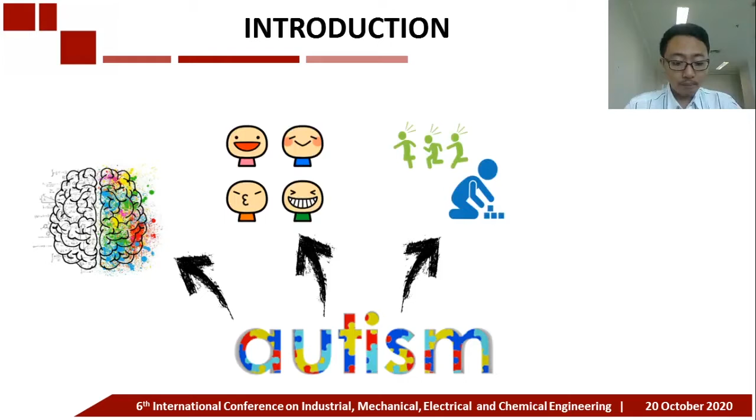Autism is a disorder that covers cognitive, emotional, behavioral, and social areas, including the inability to interact with people around him. Autism behavior is classified into two types, namely excessive behavior like headbanging, screaming, kicking, and others, and deficit behavior in the form of reduced eye contact, not responding, and being unable to socialize with others.

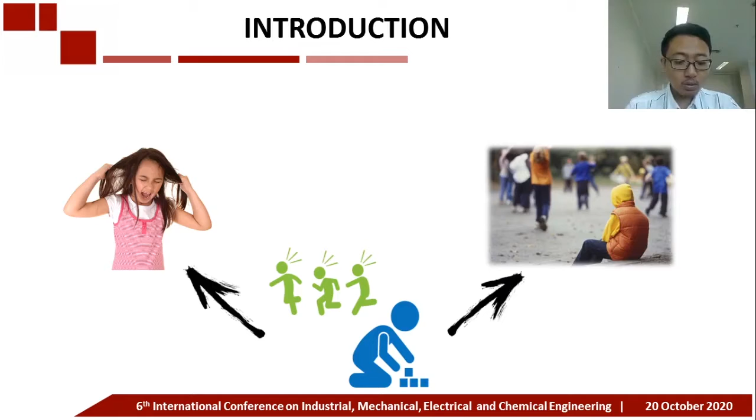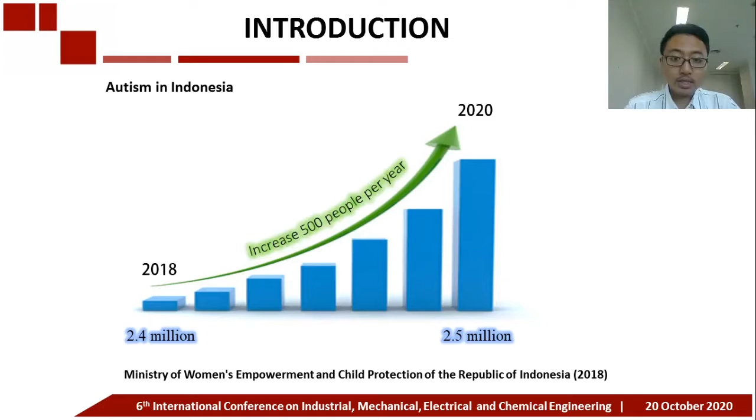Based on estimated data from the Ministry of Women's Empowerment and Child Protection of the Republic of Indonesia 2018, there were around 2.4 million people with autism in Indonesia, with an increase in new people reaching 500 people per year. So the estimated number of autistic children in Indonesia in 2020 is around 2.5 million people.

Autism therapy methods currently being developed include the deep pressure method. The deep pressure method is the application of certain pressure and in a certain time in depth on most of the outside of the body evenly. Deep pressure helps overcome the problem of oversensitivity to touch and can eliminate nervousness in children with autism.

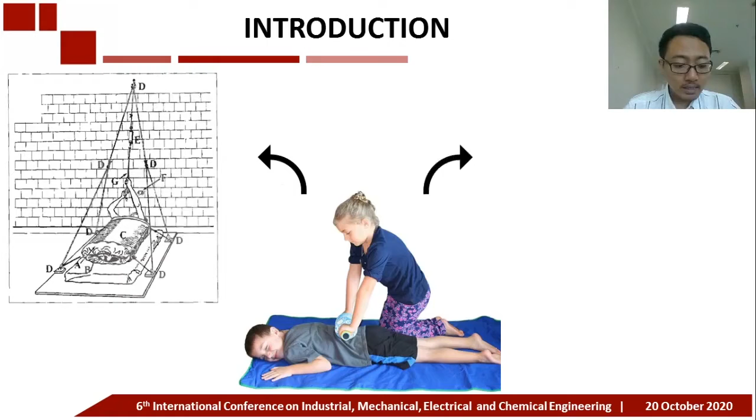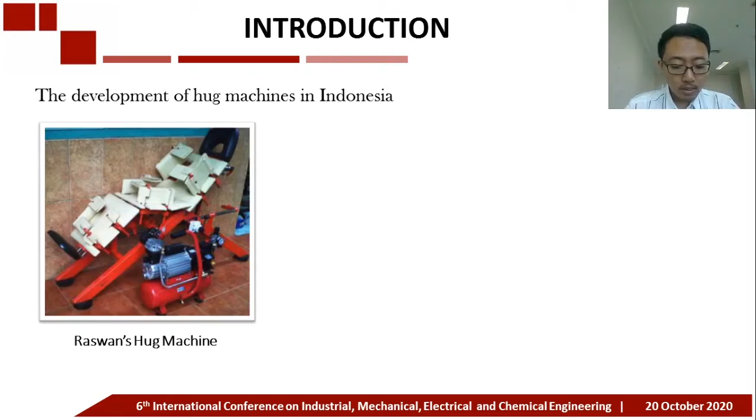The creation of deep pressure therapeutic aids in the form of a hug machine began long ago, like Krause's hug machine apparatus and Grandin's squeeze machine. The development of hug machines in Indonesia is still very limited. Raswan introduced a hug machine design based on the Grandin squeeze machine. The autistic child gets deep pressure from 3 pairs of pressure arms controlled by a pneumatic system. This hug machine has neither a portable nor a compact design.

Naufal designed an autism mobile seat. The pressure used an inflating wrap implanted inside the tool that can put pressure according to the user's wishes, using binding arms that can be wrapped around the body from the shoulder to the feet. This seat is designed to be used on transportation, but is not portable, so it cannot be applied to public transportation.

Suryo developed an inflating wrap type hug machine designed to produce deep pressure by inflating the balloon inside the hug machine, with a design pattern of fabric that can cover the shoulders up to the feet to give an even pressure. This hug machine is like a sleeping bag, so it cannot be used in public transportation.

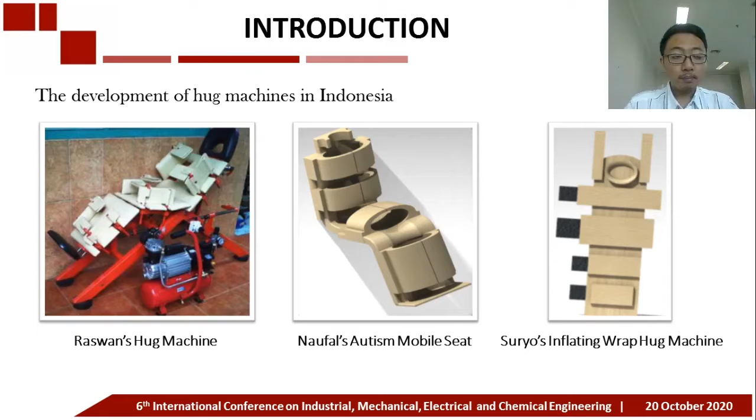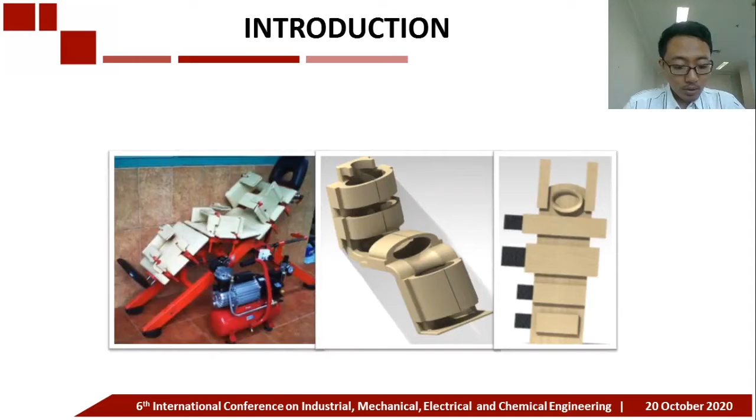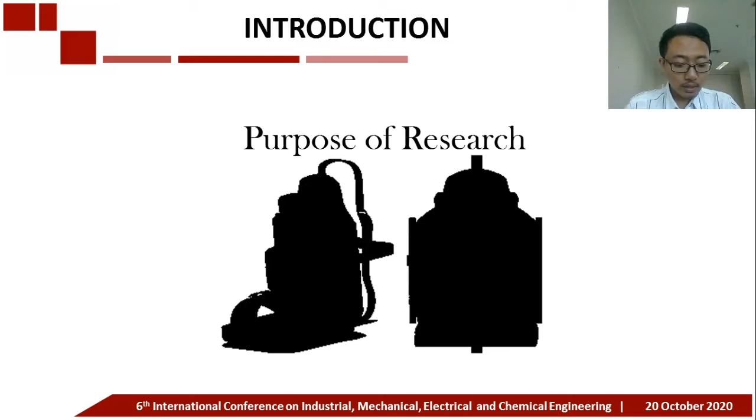Referring to the rapid growth rate of autistic children in Indonesia, the needs of children with autism for therapeutic treatment to prevent self-injury, and the few researches on tools for autistic children in Indonesia, especially hug machines, supporting facilities for children with autism and the development of more practical hug machines are needed. The purpose of this paper is to design aids for autistic children in the form of a portable seat, which can be applied to public transportation to provide a safe and comfortable facility to children with autism.

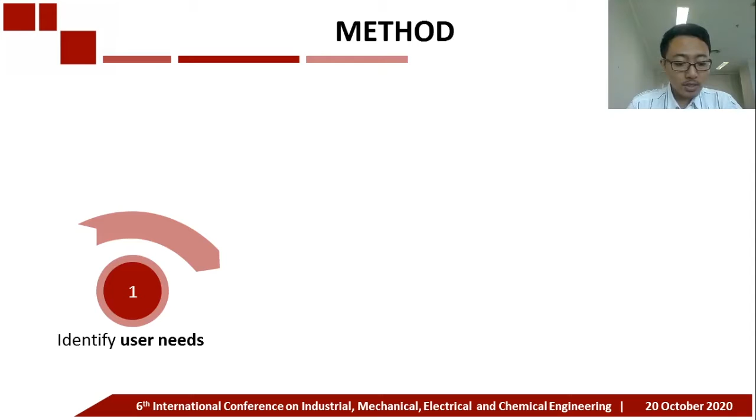In designing this product, several stages of the design process were carried out. The design process starts with identifying user needs by setting the problem constraints in the hug machine design process. Limitations of the problem include portable and lightweight, fit to the bus seat dimension, can serve 6 to 14 years old children, and have competitive prices.

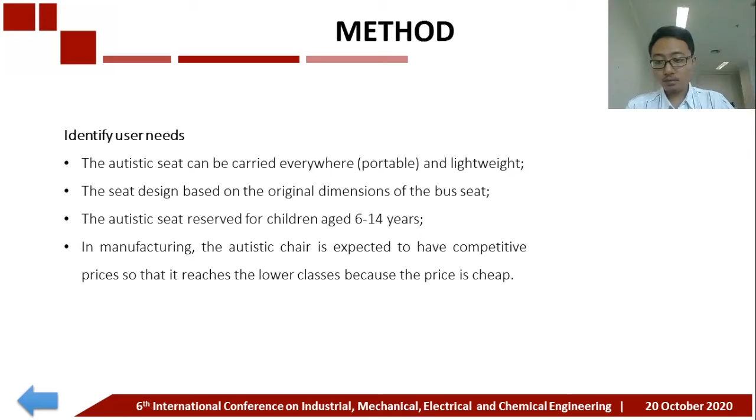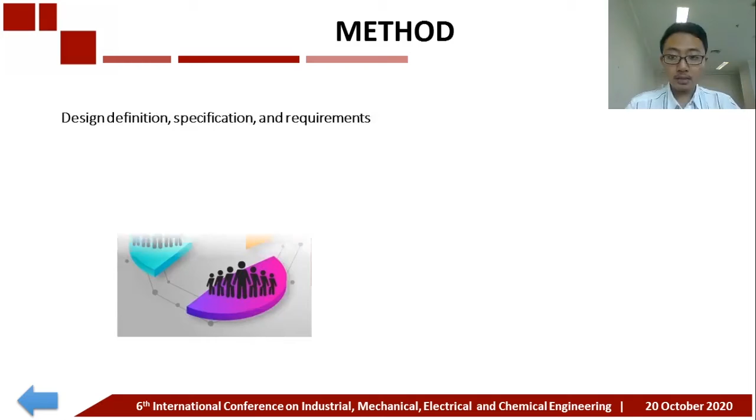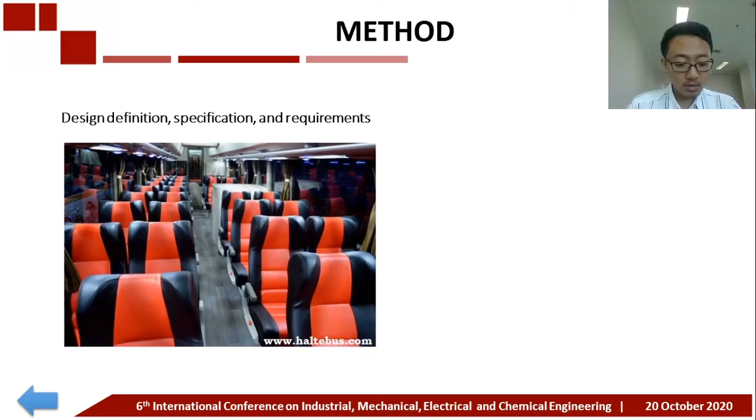The second stage is design definition, specification, and requirements. This stage is carried out by a survey of needs and technical specification of the product, ranging from market segmentation, anthropometric data literacy as a hugging dimension reference, a morphological survey of public transportation chairs as a reference for the dimension of the hug machine, and determining the material and color of the product.

The next stage is design conceptualization. The conceptualization design starts with determining the design criteria before designing the design choices using computer-aided design software. There are two kinds of design criteria, namely the must and the want criteria, that can be seen on the screen. The must criteria are strong, safe to use, lightweight, practical, and comfortable. And the want criteria are affordable prices, easy maintenance, durable, and easy to install and use.

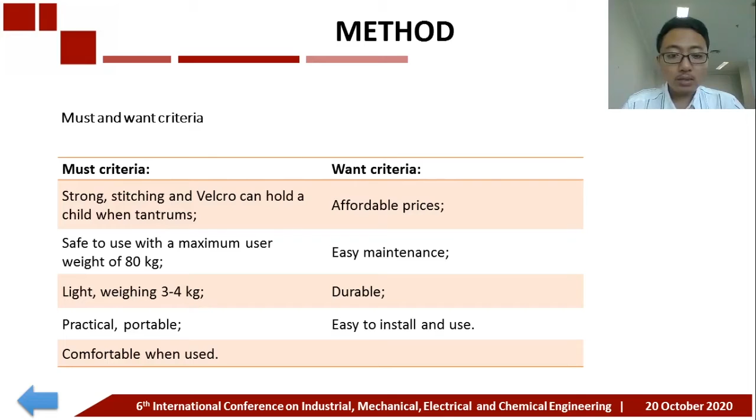And the next stage is design evaluation. The final stage is design evaluation using a decision matrix that is adjusted to the problem constraint and desired design criteria.

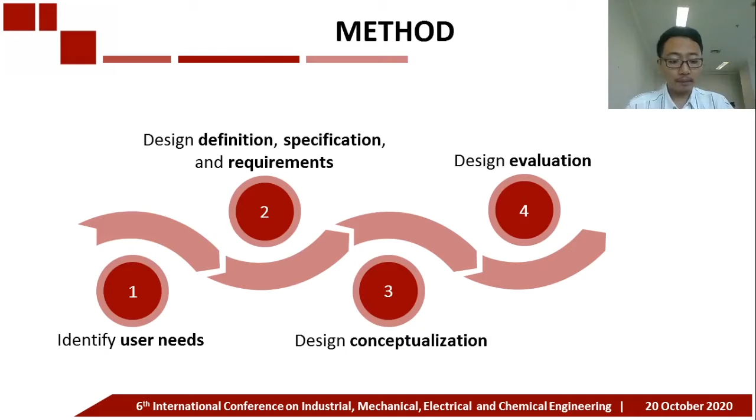The results of this design study are based on anthropometric data of children in Indonesia. Anthropometric data used are arm height and chest width, being referenced in the manufacture of this hug machine.

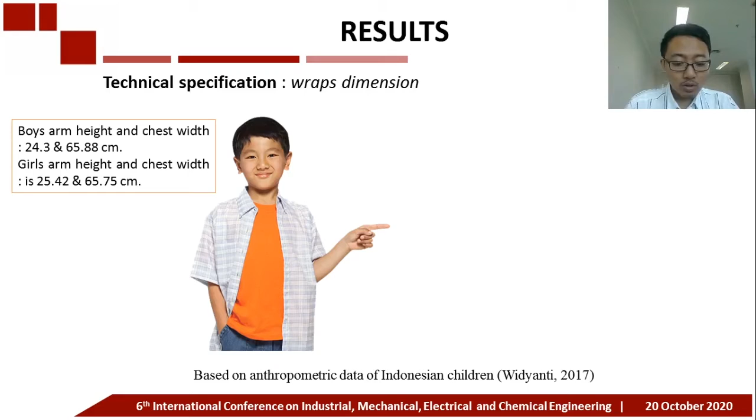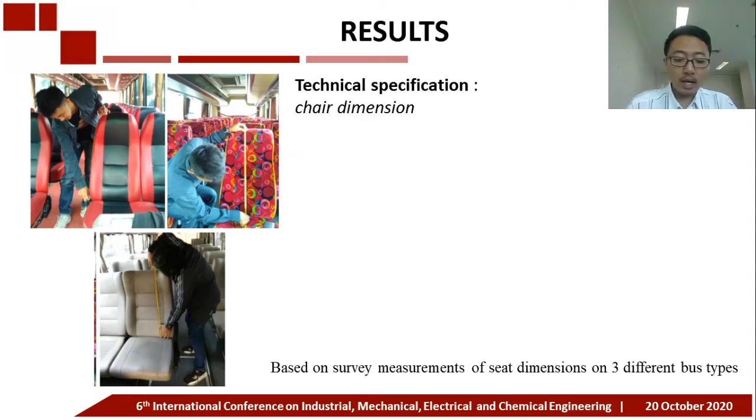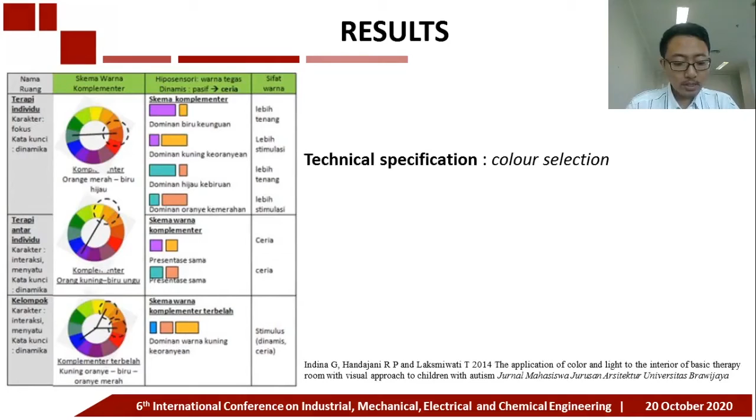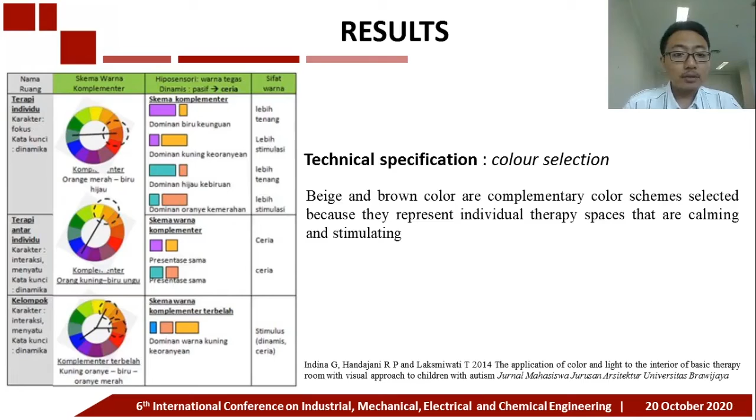Coloring affects the visual appearance of the autism hug machine portable seat on the response of autistic children. Children with autism usually become very sensitive or even unresponsive to sensory stimuli. Beige and brown are complementary color schemes selected because they represent individual therapy spaces that are calming and stimulating.

Next, design conceptualization. Based on the must and the want criteria and following the technical specification, four design concepts are proposed with the information explained in the morphological matrix.

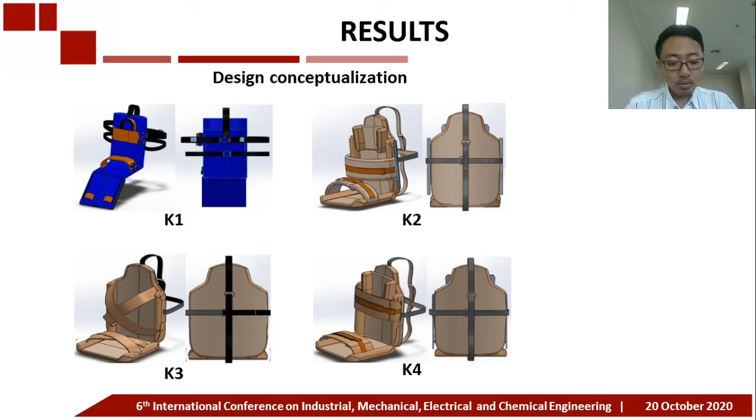This slide shows 4 design concepts, and all design concepts have morphological differences, which can be seen in the table. The 4 design concepts are then made into morphological variations.

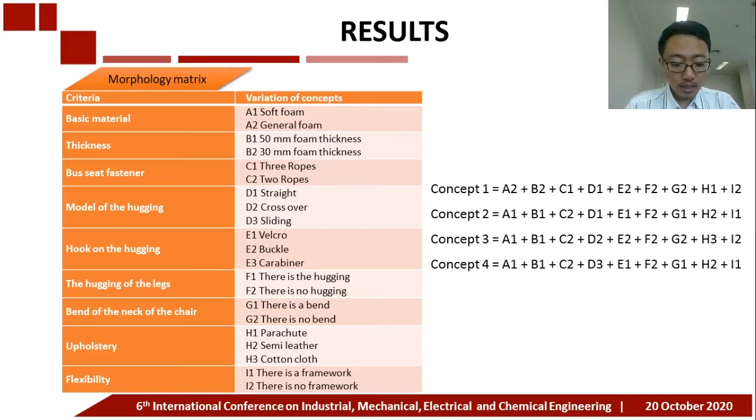The 4 design concepts are then evaluated using a decision matrix to choose the most appropriate design. Based on the decision matrix table, the total point of each concept design can be seen in the total row. Then the chosen concept design is K4, with the biggest total point.

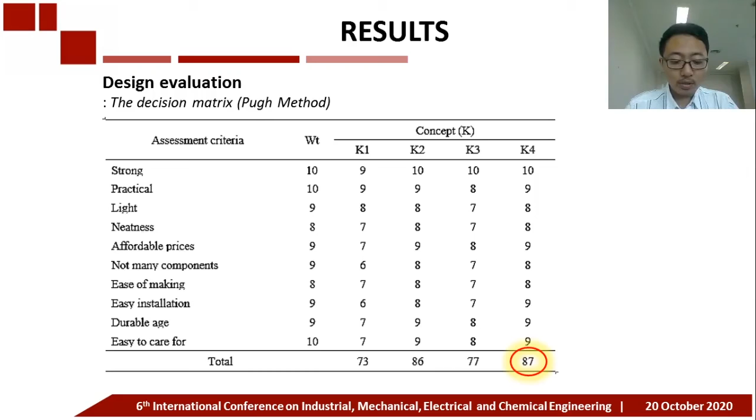This concept 4 is very concise and easy to carry everywhere. So this machine is very easy to use on public transportation. The design of this concept can be folded between the backrest and sitting part, making it more portable.

This hug machine functions as a safety and comfort provider seat for autistic children when they travel using public transportation, as can be seen through the hugging feature and the selected materials.

It has horizontal and vertical belts behind it, so it will tie to the vehicle seat. The belts can be adjusted so that the hug machine is firmly attached and doesn't shake, to ensure this seat stays in its position and make sure of the safety of using this hug machine.

The design of this machine is very comfortable to wear because it uses soft foam as a base. Active contact with soft foam can increase the deep pressure effect and then increase the calming sensation and comfort.

Soft foam as a base is coated with semi-leather fabric so that it can give the impression of a human hug, and it has a cheaper price than leather fabric. Concept 4 has a neckband that functions as a pillow to make a comfortable feel for the user.

Autism hug machine portable seat manufacturing materials are easily found in the market, and the design is easy to produce. This hug machine can be used as a therapeutic tool for autism using the principle of deep pressure stimulation.

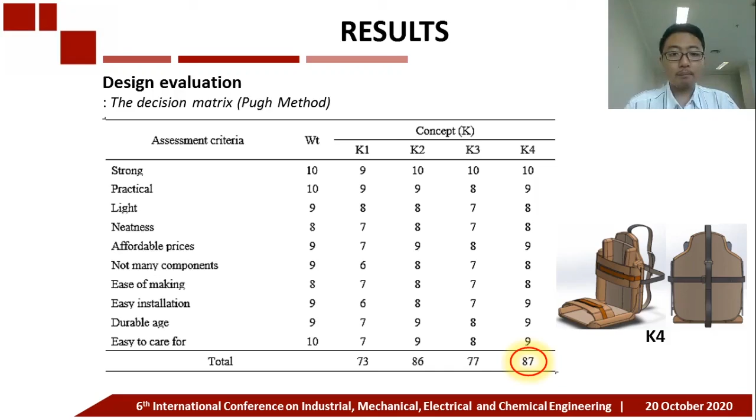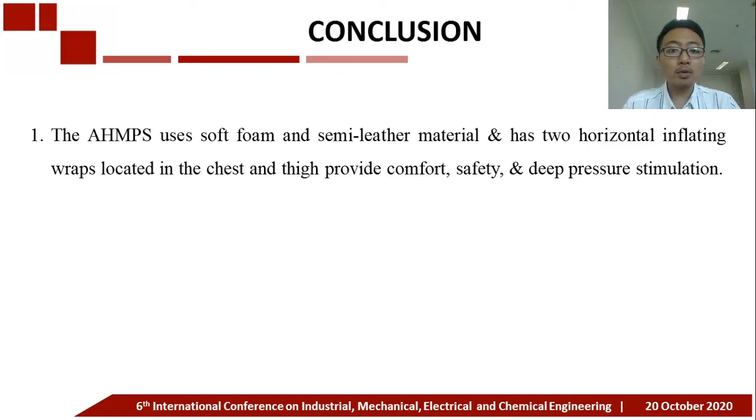The Autism Hug Machine portable seat uses soft foam and semi-leather materials and has two horizontal inflating wraps located in the chest and thigh to provide comfort, safety, and deep pressure stimulation.

The study shows that concept design 4 was the best for three reasons: attractive, concise, and portable design for public transport application. This hug machine has a triple function, which are safety, comfort, and the pressure-based method.